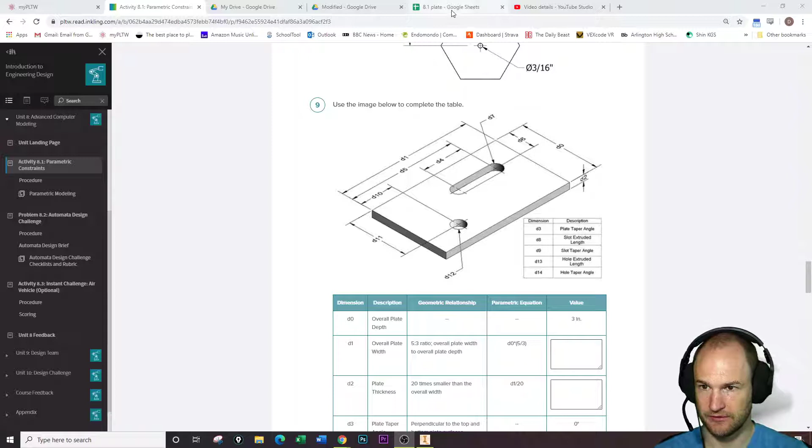Alrighty, so we're gonna draw this plate using parametric modeling. And what you'll have to do if you don't have Inventor is you're gonna have to fill in all this information here. But I do have Inventor, so I'm gonna run through it in Inventor.

And I almost always would tell you that when you are doing this, you should be doing all your parametrics ahead of time and filling it out. But I am just going to go through and run it in Inventor. So I've actually brought this to the other side. I may bring it back to reference it.

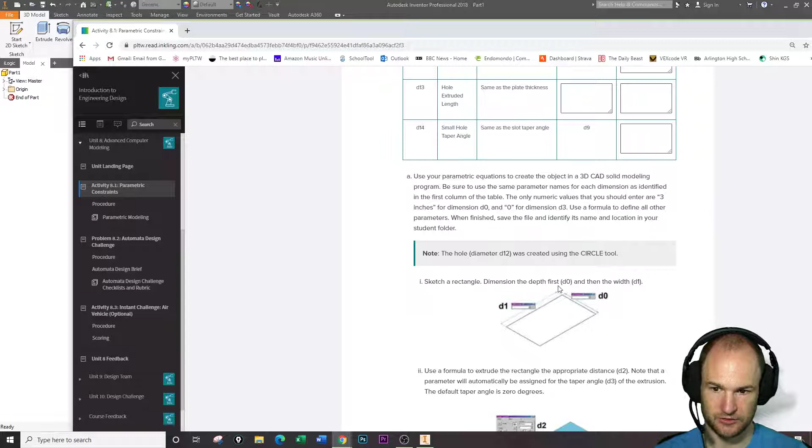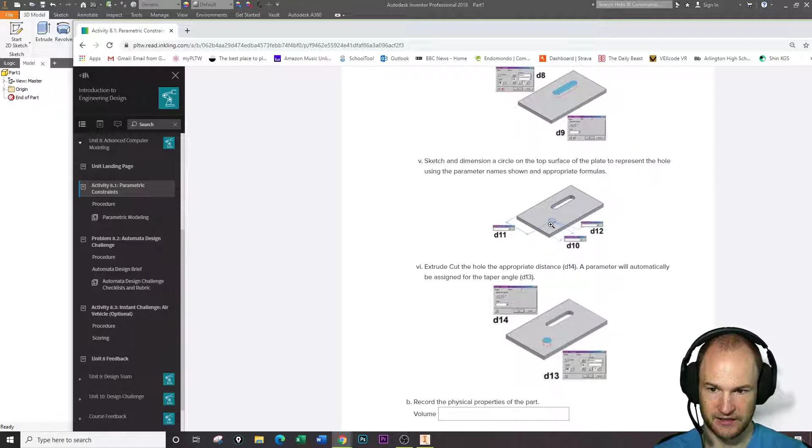And if I actually go down, it actually walks you through what it wants you to do. So it's like, okay, first sketch the rectangle and do your dimensions for D0 and D1. Very important to get those right. And then extrude it, and then we put the slot in. And then we put the circle in. It goes through and it shows you individually where you should be doing every part. So I will be following that procedure through here in case you don't see it.

So the first thing it would want in Inventor is just for us to do this on the top plane, and it always rotates, so I'm just going to change that, and I'm going to draw my rectangle as such, kind of like that. Dimension is not important because we are going to put that in, and I actually have to go and start looking at the dimension. So it says that D0 should be this face right here.

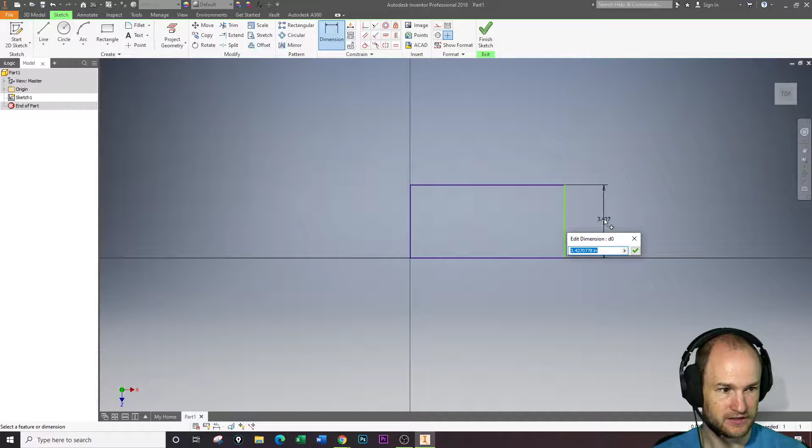And D0 is very simple because D0 is going to have an actual value. So I'm going to say 3. So D0 is 3. No formula, no nothing. It's just going to be 3. No parametric equation. Now, the second one, it gives you the answer for D1.

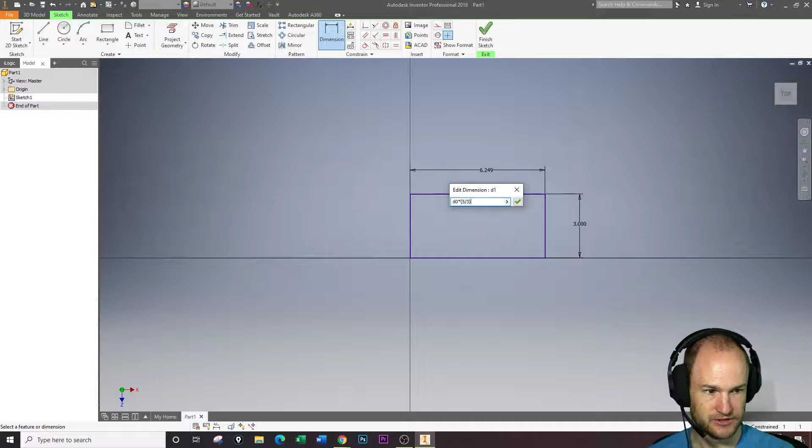And D1 is D0 times 5 divided by 3. It gave us this. So it gave us what D1 is going to be. So D1 is D0 times 5 over 3, which is going to give you the function 5 here, which is very good. Okay, so that one was pretty easy.

And then the next step would be to extrude the plate, which I am doing. I'm going to hit extrude now. And it says the extrusion is going to be 20 times smaller than the overall width. And the width is D1. So I'm going to say D1 divided by 20, because it's 20 times smaller than D1.

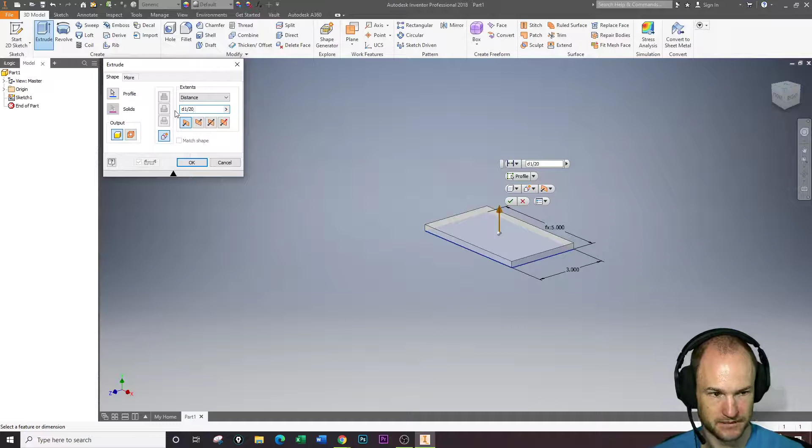Okay. And the taper angle is going to be 0, so that would be right here. This is the taper angle. It is going to be 0, so I can just leave that as it is. Okay, so there we go. I have this. I want to be looking at it from this side, because this is how you would be looking at it. And what are we going to do next?

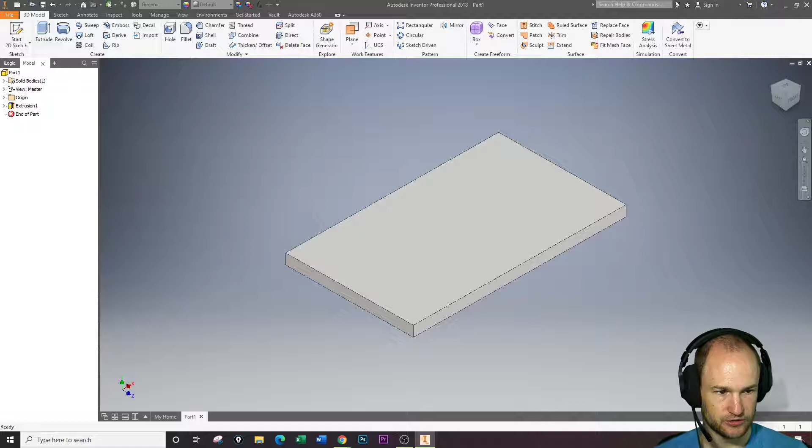So next we've got to create a sketch on top, and we have to draw a slot. Now there's a couple ways to draw a slot, but I am just going to use the slot tool with 2 centers, and I'm going to try to drop this as nicely as I can in here. Okay, so I have a slot now. Okay, and the slot has 1, 2, 3, 4 dimensions.

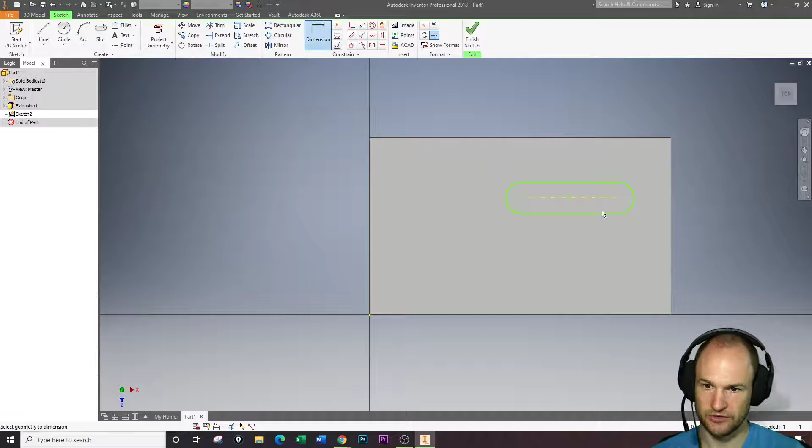So the first of those 4 dimensions is D4, which is here to here. So D4 being there to there, and D4 is half of the overall depth. So the depth, if we look at it, the overall depth of the plate was D0. So we're going to say D0, and half of D0 would be dividing it by 2. So that is what we get for that, for D4.

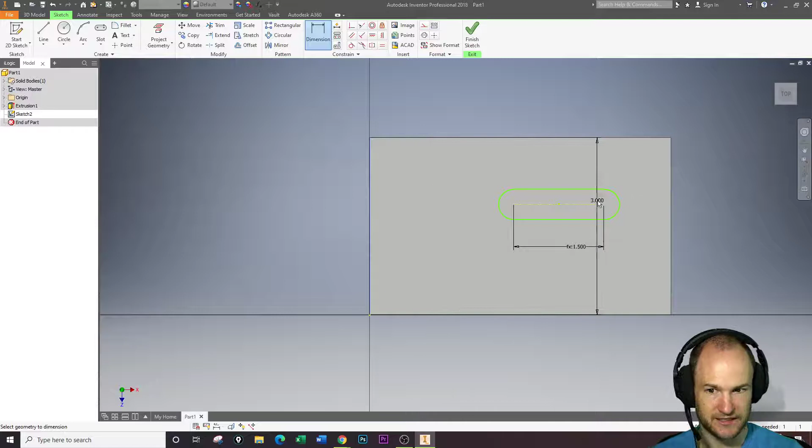Now where is D5? Now D5 is a location dimension. So D5 is from the edge over to the second center. And this is one of the first ones we actually have to do ourselves. So it is 4/5 of the overall plate width. Okay, so there's a couple ways we could do that. So let me see, which one was the plate width? Plate width was D1.

So it is 4/5 of D1. So we could do this a couple ways. We could do D1 times 4 divided by 5. This would be acceptable. So that is 4/5 of D1, just like the other one was a 5 to 3 ratio. This is 4/5 of D1 because it is 4/5 of the overall width. So we're going to do this, and that'll go in there as a 4.

D6 is another location dimension, so we're locating that same hole from this top edge. And D6 is 1/3 of the overall plate depth. So the plate depth was again D0, and then it is 1/3 of that. So it should be 1 inch, and it is. So there we go.

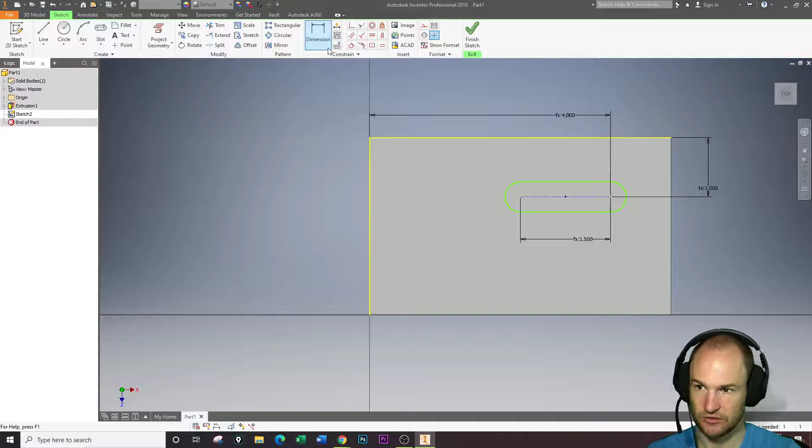And then the slot diameter is the same as the plate thickness. So if we're going for the slot diameter, we have to click the diameter, and that would be the same as the plate thickness, and it gives us this answer because the plate thickness is D2. So we just have to put D2 in here. Alrighty.

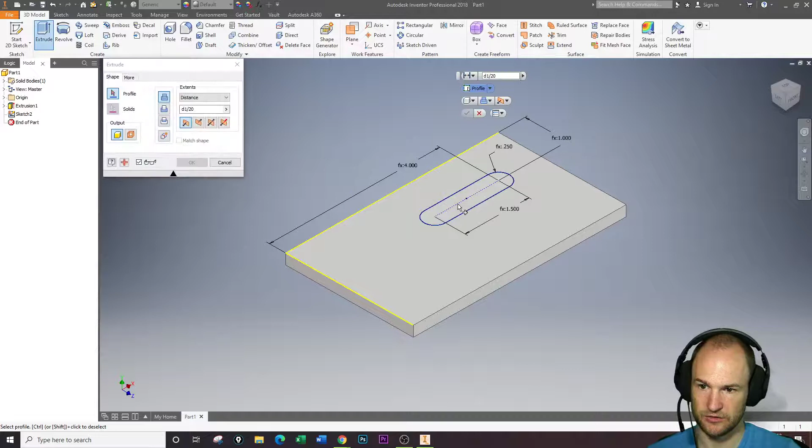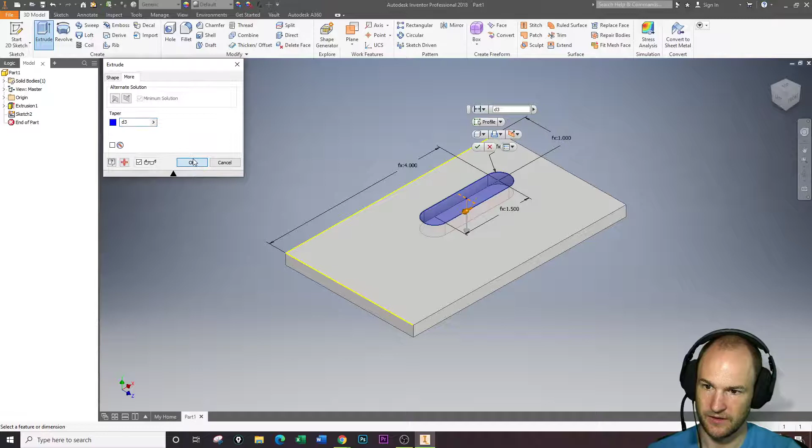All right, and next we are going to extrude this plate. So we're going to extrude, and we are going to cut it. And it says the extrusion length is the same as the thickness. We already said the thickness was D2. Okay. And the taper angle, which we go into here, is the same as D3. And we click OK, and we have our slot cut out.

Very good. So next we're going to make a sketch for our hole. So we're going to do a sketch on the top, and we're going to drop our hole in here somewhere. And I've got to just scroll up quickly. So we should be on D10 now. So this is a good way to check. So from here to here, when we click down, this is in fact D10, so that's very good. We're still on the right track.

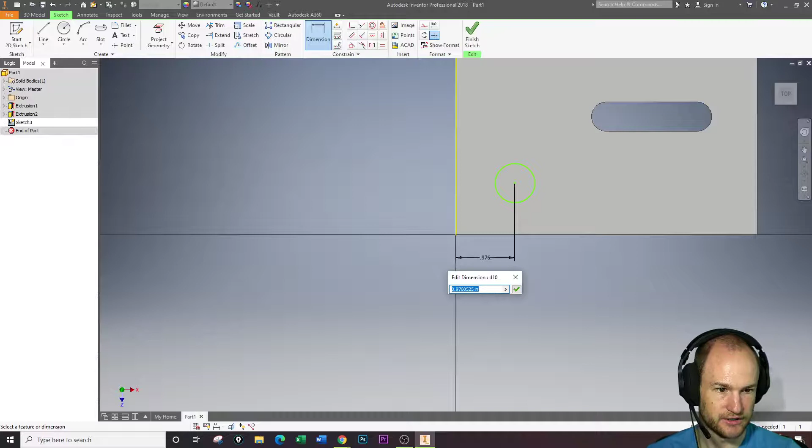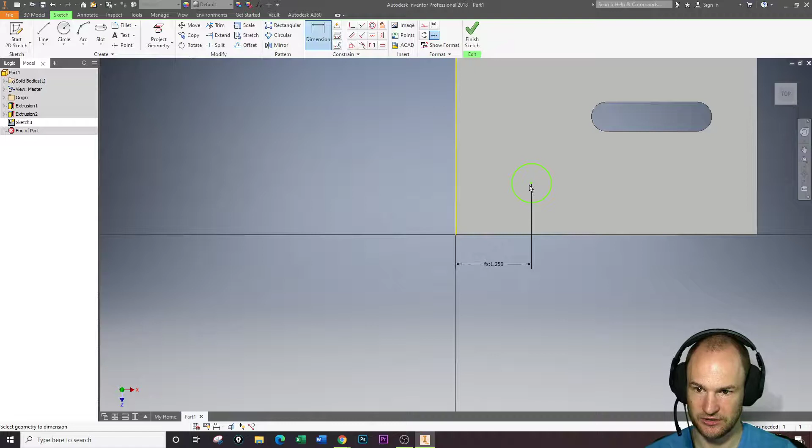And it is 1/4 of the overall plate width. So the overall plate width is D1. And then there's a couple ways to do this, but I'm just going to do 1/4 as a quarter, so I'm going to do times 0.25. So that was that one, and then D11 is another location dimension. So I'm going to do this one right here.

And what's it asking for D11? D11 is 2/3 the overall plate depth, so the plate depth was D0 times 2 divided by 3. That's 2/3. Okay, so I'm going to click check. There we go.

And the hole diameter, so I got to grab the hole here. The hole diameter is twice the slot radius, and it gives us this. This is 2 times D7. So 2 times D7 would give you the hole diameter.

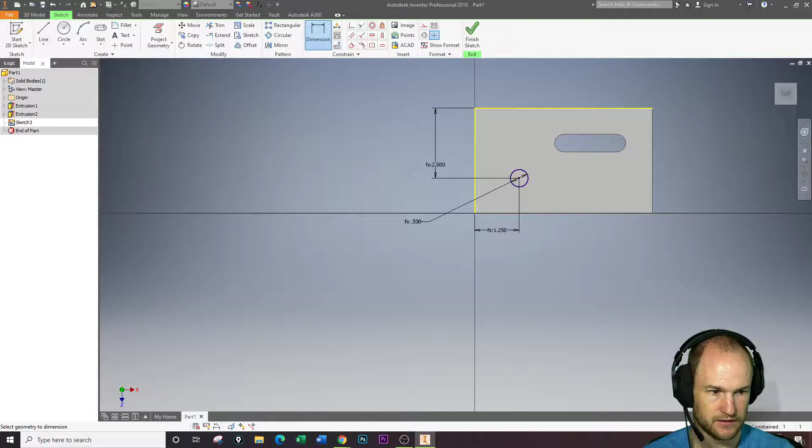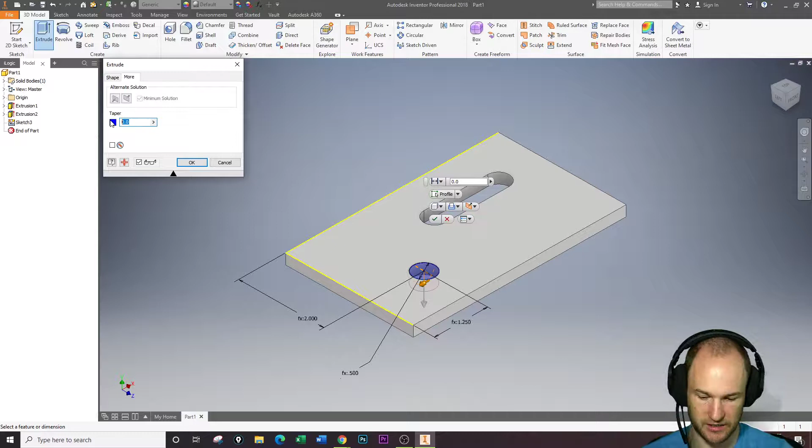And then we're just going to extrude this. So I'm going to hit finish sketch. I'm going to go to extrude. I'm going to click the hole. I'm going to do a cut. It is D2 again. And this would be D3 or D9, really your choice. It's all the same. So I'm just going to say D3. And there we go.

So now that you have it drawn, if you're in Inventor, what you would do is you'd go to the parametric chart and look here, and these should be all of your model values or nominal values to match, which you could then post to me. Okay, so that's what we're looking for from you if you're doing Inventor.

If you are not doing it in Inventor, hold on, I got to pull up Google Sheets here. If you're doing it on a Google Sheet, you would then start going in and filling these values out. So this would be, I'm going to make this actually a value right here. So for you guys, you make that 3 because that's D0. So you would say equals this, which is D0.

And then, actually, no, I'm going to leave it the way it was. Equals, and then you go to D0, whatever D0's value is, and then times 5 divided by 3, and we hit enter, and we should get our 5 in there. Okay. So if we went back to my model here, you would see that is what we get here. So this chart should match.